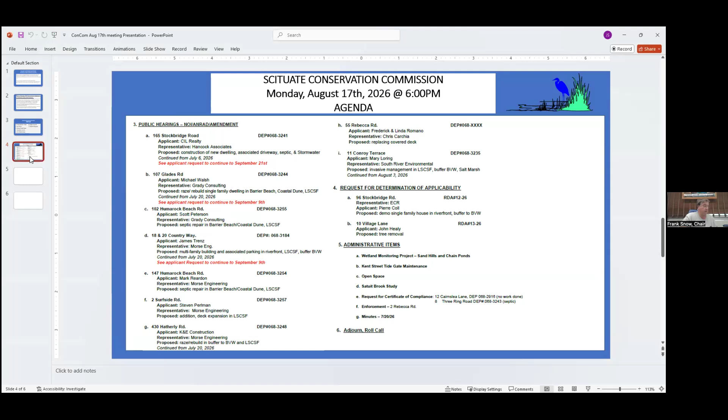So that said, we have an agenda. Are there any additions, omissions, or changes to the agenda? I don't think so. Just so folks know,

1820 Country Way has requested a continuance till September. We'll read that at the time of the hearing. Is that the only one being continued? No, there's two more. Stockbridge Road to September 21st and 107 Glades Road to September 9th. So if you're waiting for those, 165 Stockbridge is requesting a continuance, and 107 Glades is as well. They're not going to be held tonight, but we'll move right into them now. Any other additions or omissions to the agenda? No.

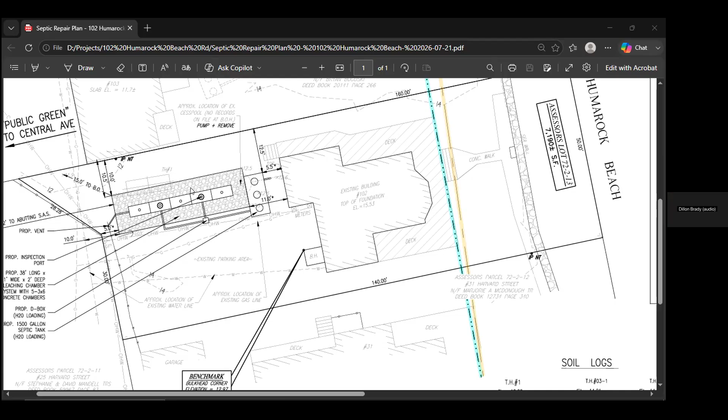I know it's a little redundant, but is that all gravel that's there now? Do you know? It's sand, it's coastal dune sand. So a silt sock would actually— we're amenable to that. Just wrapping it around, we can connect it with the deck. So basically go around the system and be open so you can get equipment in and out. Okay, right, okay.

I think that's it for me. And we asked anybody in the audience, right? No. Frank? Yes, just one thing, Jen, could you put in the orders if the vegetation does get hurt, destroyed, that they will replace it if need be on the south side? Yes. Okay, that's all I wanted. Thank you.

So, you want me to make a motion? I make a motion to close this issue. It's a motion from Penny. Do we have a second? Second from Brendan. All in favor? Eric? Yes. Roger? Yes. Robbie? Yes. And Frank, yes.

Okay, 1820 Country Way, and they've asked to be continued to September 9th. I'll make a motion to continue 18 and 20 Country Way to September 9th. Second from Brendan. All in favor? Eric? Yes. Roger? Yes. Robbie? Yes. And Frank, yes.

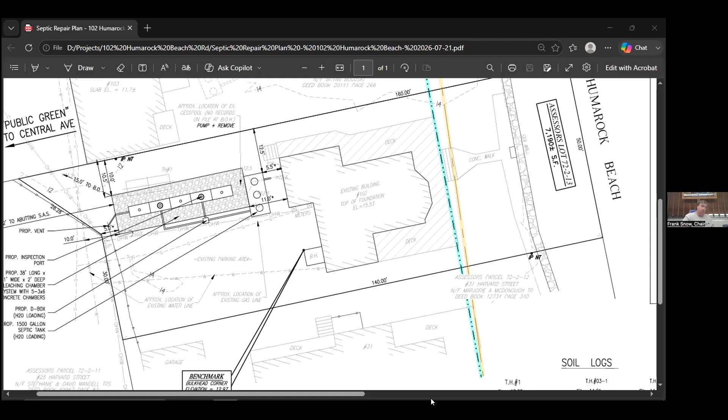So now we're on to 147. 147 Humarock Beach Road on August 17th, 2026, 6 p.m.

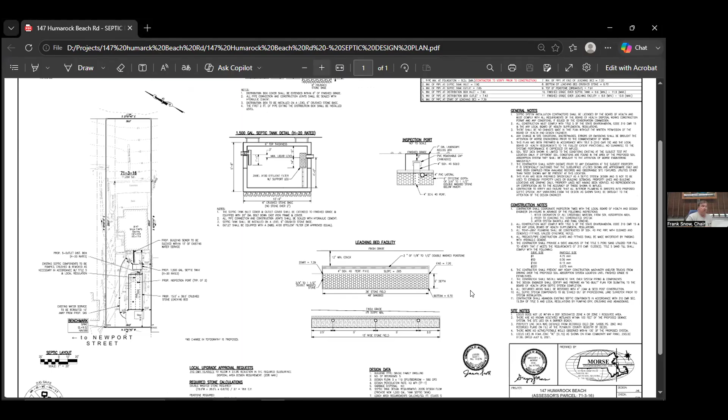The Scituate Conservation Commission will hold a wetlands hearing under Chapter 131, Section 40 of Massachusetts General Laws and Section 30700 Town of Scituate Code of Bylaws for a notice of intent filed by Mark Reardon for the repair of an existing septic system within a wetlands resource area located at 147 Humarock Beach Road, Humarock Beach, Scituate. Abutters and other interested parties are invited to attend. Information to access the meeting is available on the agenda posted on the town website.

So what do we have on that one? This is Greg Morse. Good evening, Greg. Good evening. For the record, Greg Morse, registered engineer, Morse Engineering, representing the property owner, Mark Reardon.

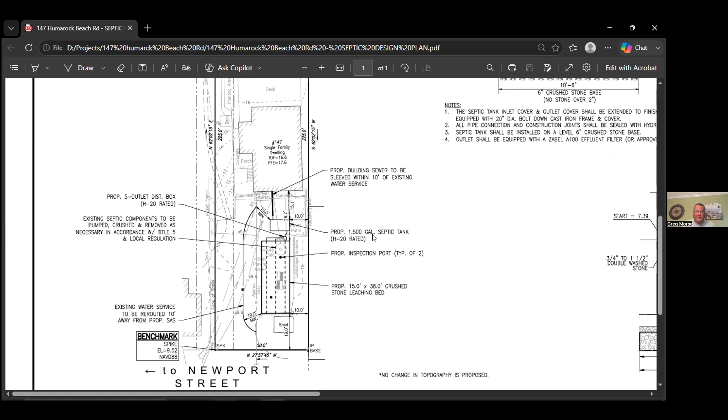This is a notice of intent at 147 Humarock Beach Road for a septic system repair project. The existing site is approximately 11,250 square feet. There's an existing 5-bedroom home. Looking at the plan here, Humarock Beach, the Atlantic Ocean, is just off the top of the page. You see the existing home location, and in front of the house, there's a gravel driveway. Under that gravel driveway, there's a failed cesspool. The proposal here is to replace that cesspool with a Title V compliant system.

The new system is a 1,500-gallon septic tank, a distribution box, and a crushed stone leaching field. As part of that, we're relocating the water service to get 10 feet of separation between the water service and the septic system. The property, as you know, is a barrier beach, coastal dune. We're not proposing any change in the ground surface. The topography there, post-construction, will match what it is today.

This is entirely within land subject to coastal storm flowage. This is a velocity zone, VE 15. For reference, the contours where we're doing the work are at approximately elevation 10. Again, this isn't new construction, we're not adding any flow. This is repair or replacement of a failed cesspool. I'll turn it over to you.

Okay, thank you. Jen? Yes, similar comments. DEP issued a number and they did not have any comments. Board of Health is okay with the plan. I didn't have any other questions.

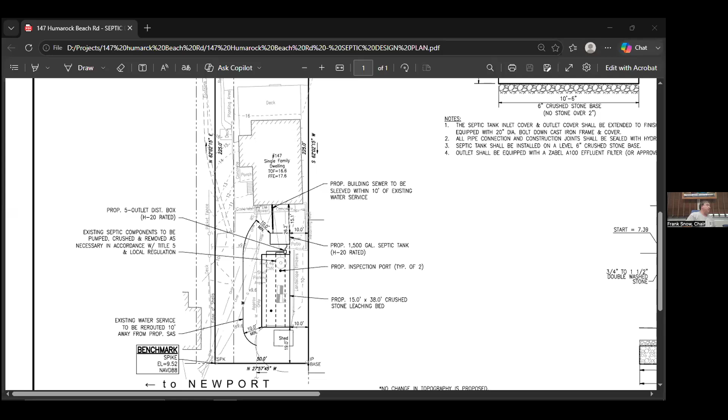I have to open this one. On August 17th, 2026, Scituate Conservation Commission will hold a wetlands hearing under Chapter 131, Section 40 of the Mass General Laws and Section 30700, Town of Scituate Code of Bylaws, for notice of intent filed by Steven Perlman for the construction of an addition, deck expansion within the wetlands resource located at 2 Surfside Road, Scituate. Abutters and other interested parties are invited to attend. Information to access the meetings is available on the agenda posted on the website.

Again, for the record, Gregory Morse, registered engineer, representing the property owner, Steve Perlman. This is a notice of intent for his property at 2 Surfside Road, which is down in the Minot neighborhood.

This property is at the corner of Gannett Road and Surfside Road. It's an 11,198 square foot lot within land subject to coastal storm flowage, the only resource area at the site. The FEMA floodplain here is an AE zone at elevation 16, and the topography on the site is generally at elevation 14.

As you see on the plan here, the property was previously developed. There's a single family home and a driveway, connected to municipal water and sewer service. The proposal is to construct an addition to the single family home, and that's in a couple of parts.

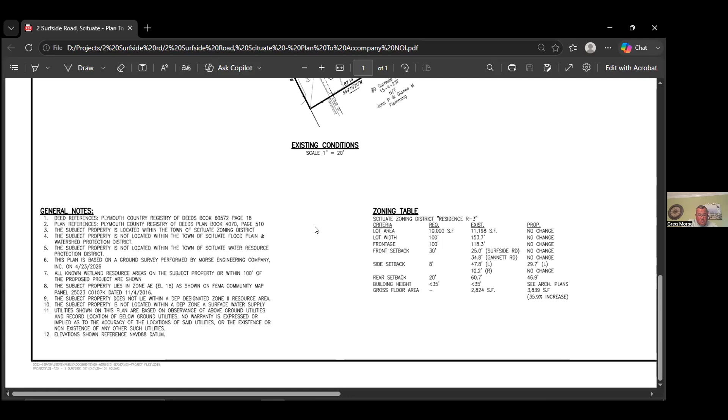Do we have an infiltration rate, or are we just... Let's see if we go down to brick pavers, the pavement. Yeah, what we're specifying under it, we have 12 inches of gravel, an inch of washed stone, and then bedding sand, and then the pavers on top of that.

So we didn't provide an infiltration rate for it, simply because it's below the standards for a stormwater permit. Even if the driveway itself wasn't considered pervious, it would still be below the thresholds for a stormwater permit. Okay, right, thank you, that was my only question.

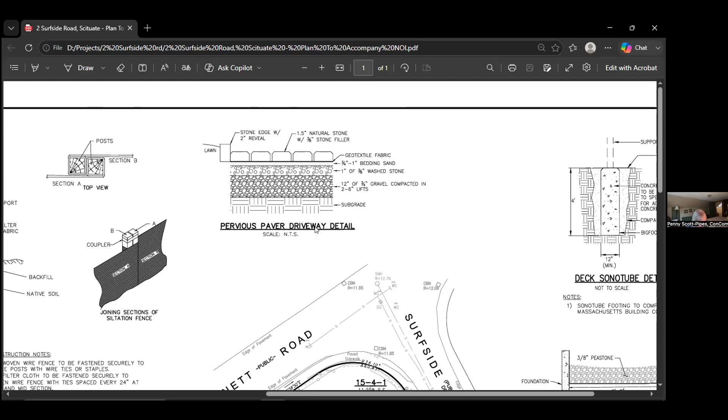All right, do we have anybody in the audience for this one? Go ahead, Jen. No, I was gonna say I don't see any hands raised. I don't know that I have any.

I think it was Robbie that raised the question about elevating to the 2 feet. And it's my understanding on these projects, if the building department deems the value of the renovation or addition to be less than 50% of the value of the existing structure, then the applicant's not required to elevate the house up.

That other one dealt with this several years ago, where there was a house that was just at 1 foot, or maybe at base flood, and because the value of the renovations didn't exceed 50% of the value of the structure, the building department didn't require them to elevate the building. If it was a substantial renovation where everything was getting rebuilt, that could come into question whether it should be elevated the other foot.

But it was sort of left up to the building department for their compliance with the FEMA regulation. That's how I recall it.

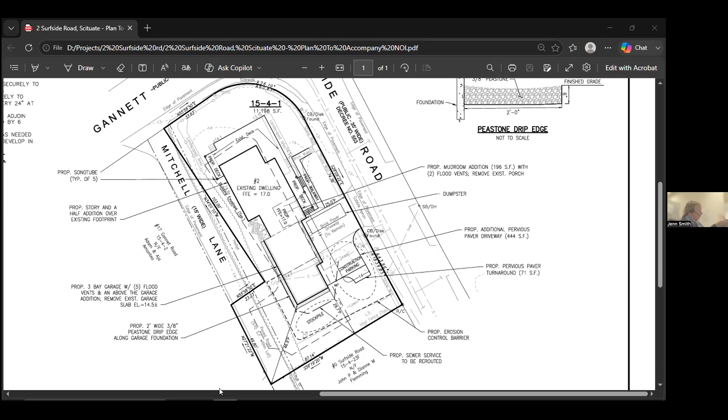For the applicant, K&E Construction, Gregory Morse, registered engineer. This was opened previously. This is a notice of intent for a raise and rebuild of a single-family home at 430 Hatherly Road.

Since the last meeting, we submitted revised plans, both my office as well as Brad Holmes, our wetland scientist, and we made a couple of revisions. Those revisions I'll point out here: we specified under the elevated deck on the back of the house that it would just be crushed stone, not patio surface.

Secondly, we added extra construction detail at the front of the property, identifying the soil stockpile location, dumpster location, and contractor parking, which is in the front yard over the existing driveway surface already at the site. Then thirdly, along the back of the property, which abuts Musquashcut Pond...

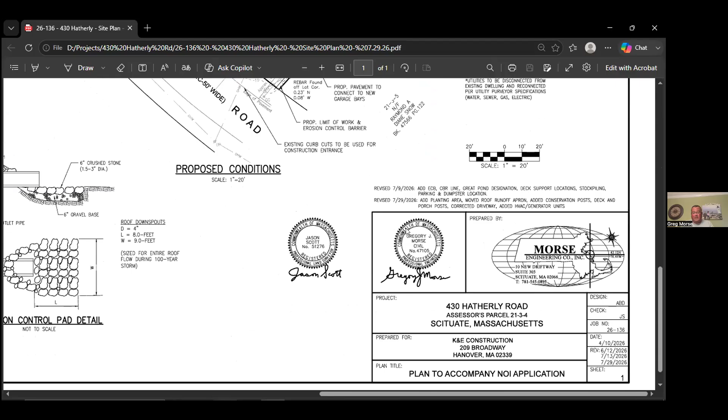One of the questions I have—is there any other building on this property that exists today that's being taken down? There's a house on the property, and there's also a shed in the backyard. The shed comes down as well. The shed is coming down. Okay, yes it is.

I just want to make sure, if there are other sheds, are they planning on putting a shed back up at some point? Not as part of this proposal, no. Okay, perfect. That's all I got, Frank.

Is this a full foundation on this project? It's a poured concrete foundation, yes. Is it the same footprint as the original foundation? No, it is larger in size.

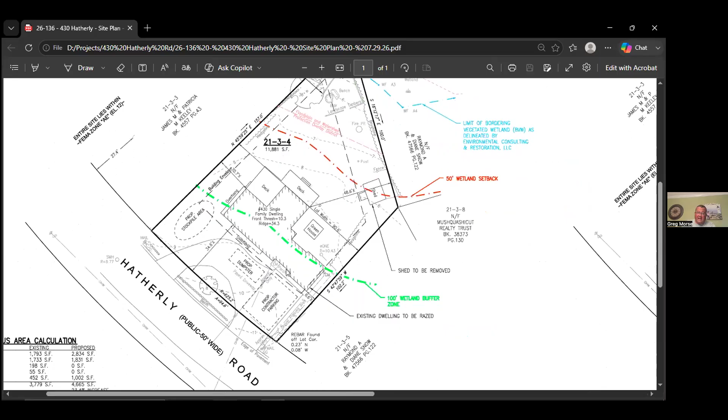Is there any way we can show the existing? Yes, so the existing is shown as a dashed gray line. If you zoom in to where the proposed house is going, you can see that we've overlaid it. So this puts more structure and more foundation closer to the resource area? It does—it's outside of the 50-foot buffer zone for the foundation itself, but it is more structure inside of the 100-foot buffer.

It looks like the site slopes from Hatherly towards the pond, and I assume there's some erosion control measures to protect the pond area. Yes, there's erosion control around the entire limit of work. No other questions for me, thank you.

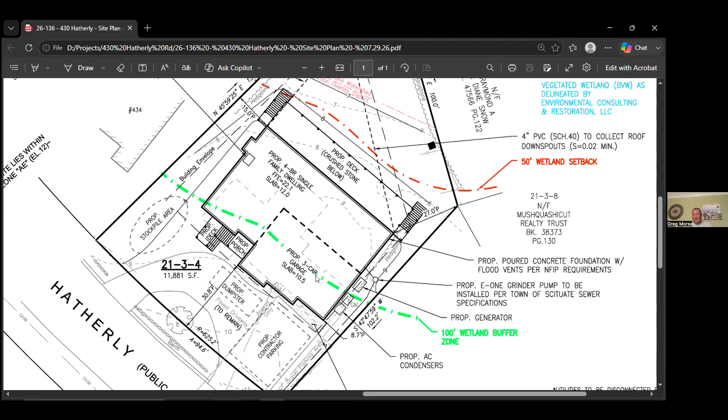This is on the corner, right? No, Greg? Well, it looks like it—Musquashkett—so if you're going down Gannett Road and you get to Hatherly Road, you take a right, and you'll cross over the salt marsh, and Musquashcut Pond is on your left. This is either the second or third house on the left-hand side as you start going up the hill.

So it is on the bend there. It's not on the corner of the street, but it is on the bend in the road. Now I can visualize it completely—I know exactly what we're getting rid of and what's going to be a brand new house there. That was my only question, I wanted to make sure I was in the right area. No, it looks good to me. Thank you.

Okay, Brendan? Oh, yeah, I think I'm all set. Thank you.

Okay, Eric? Couple questions. I'll start with the limit of work, being the entire site. There's infrastructure that needs to be installed within it, including the discharge area as well as the trench for the piping to lead to that. Is there any other sort of filtration that will be done, except outside of that riprap apron for the roof runoff discharge, Greg?

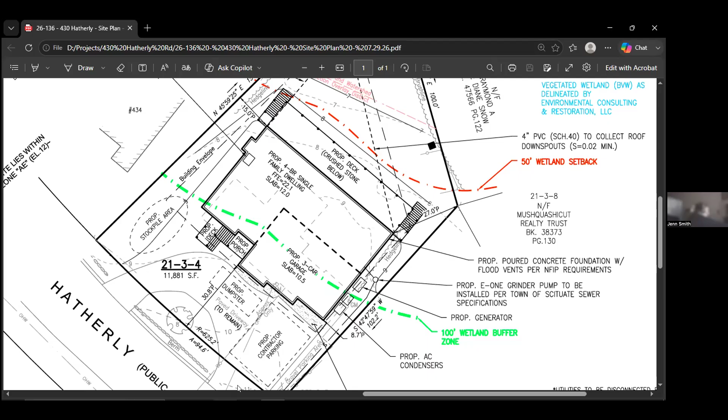Do we have a plan from Brad for that area? Yes, you do. Yes, we have that. And Eric, did you see that, or are we okay with that? Yes, I've seen it. Ted, what's your thought on the path, I guess?

I mean, ideally there would be no path, and have that whole area return to a natural state. But I think if it's managed properly, and there's no creep - because I think that's something we all can agree on, that the creep, and as Jen pointed out, not having it become a managed space is really important for this mitigation area to function as we'd like it to.

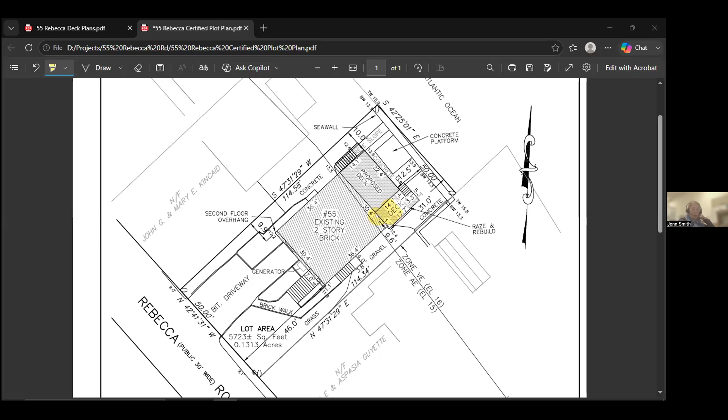11 Conroy Terrace. Did we open this? Yes, we opened it but we haven't discussed it. And do we have somebody on for this? Yes, John Zimmer is here. Okay, all set? Good evening.

Good evening. John Zimmer with South River Environmental on behalf of Mary Alice Loring, the owner and applicant for 11 Conroy Terrace. This is actually a proposal that was reviewed and approved by the commission back in 2014 under an RDA, basically to control invasive species within the property, predominantly Phragmites.

So that determination of applicability, which was a negative, has obviously expired. Ms. Loring is looking to do basically the same exact thing as she did previously, but we decided to file it under a notice of intent so it could be conducted in perpetuity, so she wouldn't have to keep coming back to the commission every 3 years for the same activities.

She's also in the process of, I believe, moving the property to her daughter, so she wanted to have that in perpetuity so that her daughter could continue to work afterwards.

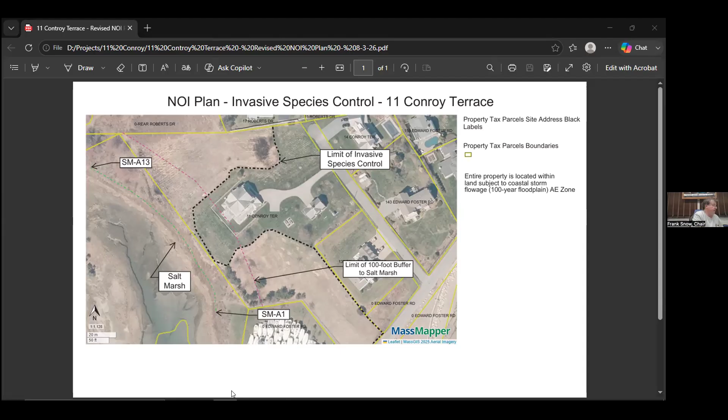So now we're on to RDAs, 96 Stockbridge Road, on August 17th, 6 p.m. The Scituate Conservation Commission will hold a wetlands hearing under Chapter 131, Section 40, Massachusetts General Laws, Section 30700, Town of Scituate Code of Bylaws, for an RDA filed by Pierre Cole for the demolition of a single-family dwelling within the buffer of wetlands resource located at 96 Stockbridge Road. Abutters and other interested parties are invited to attend. Information, access, and meetings are available on the website.

And we have maybe Brad Holmes for this one. Good evening, members of the commission. Brad Holmes with ECR. Along with me this evening is Lee Bloom, a representative for the applicant. We filed a request for determination of applicability for the property at 90 and 96 Stockbridge Road. The commission is familiar with this property—we're underway with a notice of intent for a single-family home reconstruction project here. The need has come to remove the existing dilapidated home.

There's been vandals and it's been an issue, and we may not have a permit to move forward with the larger project. We'd like to get a determination confirming that removal and demolition of the home doesn't require filing a notice and can continue. Then when we have permits for the other project under review, we can proceed. The commission has seen it's in rough shape, with recent vandalism requiring them to board up the building, so it makes sense to remove it now to eliminate that hazard. The work does occur within the buffer zone—there's a bordering vegetative wetland we've delineated that's under review, and we are within the outer riverfront area.

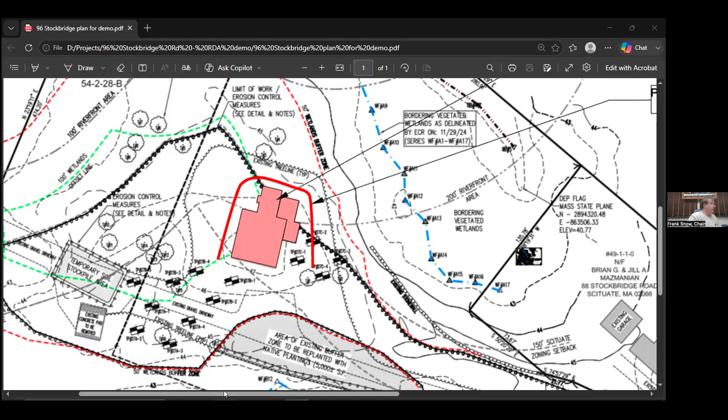You should let me know if you need me to pull something up. I got the folder. Hold on. Shoot. I don't see anything. I'm just wondering if I can go back to one of the other ones and just add a limit, Jen. All right, well, I can bring it over. That's all right. Pitched a bunch of stuff. Sorry. Sorry about that, thank you.

On August 17th, 2026, 6 p.m., Scituate Conservation Commission will hold a wetlands hearing under Chapter 131, Section 40 of the Massachusetts General Laws, and Section 30700, Town of Scituate Code of Bylaws, for request for determination filed by John Healy for the removal of diseased trees located at 10 Village Lane, Scituate. Abutters and other interested parties are invited to attend. Information and access to meetings available on the agenda posted on the website. And do we have someone?

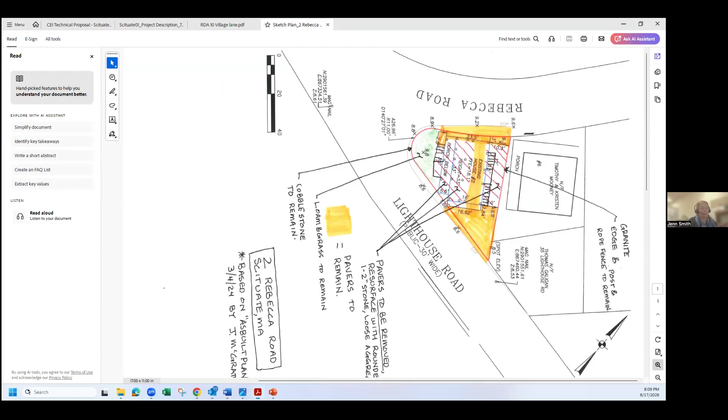What? I'm working on bringing up an image. That was the house on the corner of Rebecca and Lighthouse, and they had installed pavers on site and done some other work after the certificate of compliance was closed out. So we sent him notification, and he got in contact with Morse Engineering to come up with a proposal for addressing it. I'm working on how to share my screen at the moment. Hold on. I'll try to zoom in a bit, but hopefully you see Rebecca Road and Lighthouse.

Yeah, and actually, let me try to undo. Morse, if he would like to speak to it also, what the update is.

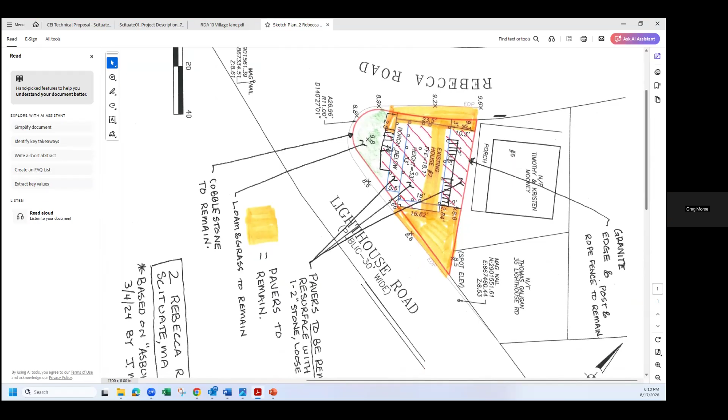Great, thanks. This is Greg Morse representing the property owner, Paul Tyrell, who's also on the call with us tonight. As was just explained, this was an enforcement issued on the property at Rebecca Road. This was a new house built in the last two years. A certificate of compliance was issued on the house itself, but after occupancy, there was landscaping performed on the site. They took the area under the house and adjacent to the roads and put down pavers across the property, and at the intersection of Rebecca Road and Lighthouse Road, at that island or centerpiece, there was some loam, seed, and cobblestones placed along the edge of the road. That resulted in an enforcement being issued.

In response, Morse Engineering has been watching the site over the past winter to see how it's performing, and we put together a letter and a sketch of what the property owner would like to do to hopefully remedy the situation. It's unfortunate that this is an after-the-fact thing. The homeowner thought they were done with the project and thought this was just landscaping. They've appeared before the commission for this and other permitting projects at this and other properties they own, and didn't realize they needed a permit for this work.

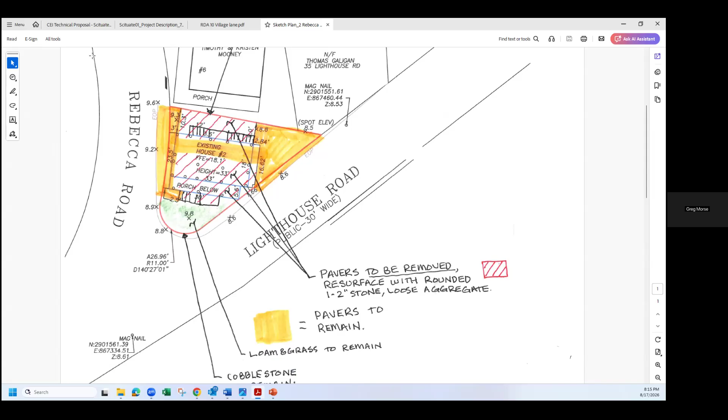This is our proposal on how to address that enforcement action, and we look forward to working with the commission to get this resolved. I'll turn it over to you. Thank you, Greg. Jen, do you want to start first?

Sure, I just want to add that this is a unique site. I agree with the delineation comments we had for the area. This part of Scituate does get hit with storms and has significant storm action, but it's a very unique site given that it's a corner lot on Rebecca and Lighthouse, with pretty much two homes immediately behind it. So it's not your traditional rectangle by any means, it doesn't have some extensive backyard.

So having said that, I can appreciate having some sort of apron and definition for just using the property. That's all I have for now. They had loosely presented this idea to me a while ago, and it's just taken a bit to have time on the agenda to bring it to the commission.

Sure. Where do I want to start? Guess last time, Brendan? Want to comment on that? Can I hold, please, for now, I guess? Thanks. Yeah. Eric?

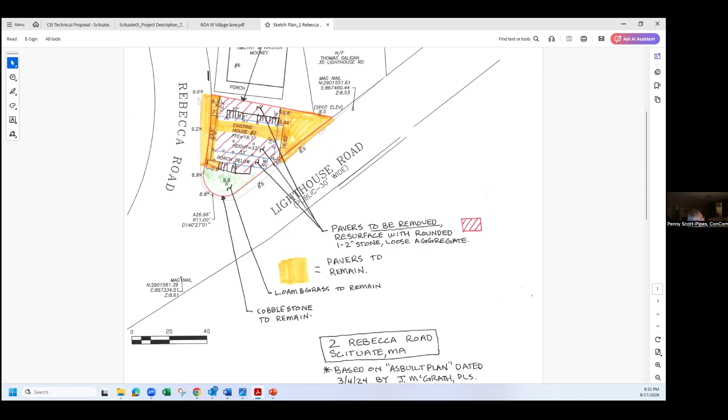So the layout is what's shown, not the edge of the road. So the layout of the road is shown, and they clearly went out to the edge of the road, not saying the rest of this is all good, but everybody that does a driveway connects to the road. Your own driveway at your house is paved out to the edge of the road, we don't leave a gap between the road. So I'm not saying other things aren't an issue, but everybody connects to the road, we don't leave gaps. Not by that footage on Rebecca Road.

That aside, Frank, I don't agree at all with the pavers. They never should have put them down. They all should come up. I'm dead set against this. I'm so tired of people doing what they want and then come to us.

Moving on. All right, Brendan. Yeah, I'm kind of with Penny on this, considering we went through a process to get this built. Whether or not I personally think it should have been built, or on this lot, this is what someone decided to do. It should be known that they were supposed to come to us about the pavers.

I haven't really heard an argument on why they should stay. I did hear that they were watching them for some time, through some storms, but do we have an infiltration rate on these pavers? On the pavers themselves, no. I haven't calculated an infiltration rate. Otherwise, they're a pervious material and they're below the 100-year flood event. This whole area is underwater during flooding events. Doesn't matter if it's pervious or not.

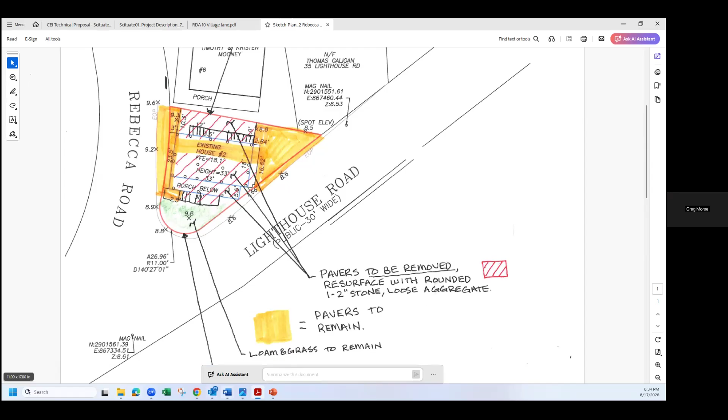I believe the existing house was on the ground, and the property owner is raising his hand. He could probably answer that question better. I wasn't the original engineer on this. Additionally, I emailed a couple photographs of the site that might help put some things into perspective. But Paul Terrell was just raising his hand if you want to hear from the homeowner. Okay, yes, and I did unmute him, and I will work on these photos.

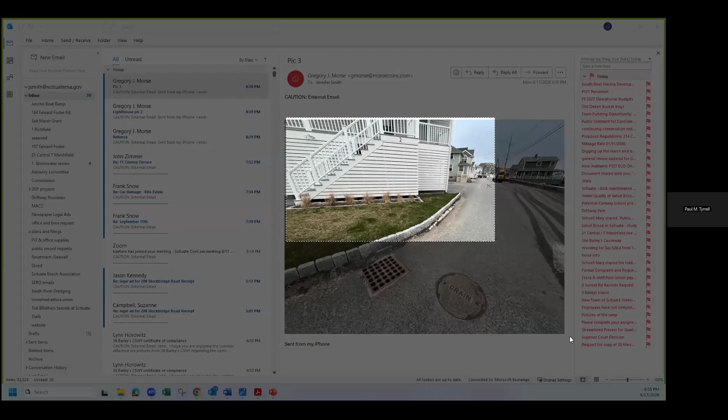Hey, thanks Jen. A couple things: I'll answer Frank's question. As I've said to Jen repeatedly, this was not done in the darkness of night, it was done as a landscaping thing. It's unfortunate, and we are also very upset that we have to be here talking to you about this. So I don't want you to think we are trying to do something wrong, it's right in the middle of the street, we can't hide anything, trust me. But in any event, notwithstanding that, your question Frank, it was

probably 4 or 5 feet up. This is a prefab, but the original cottage was the original cottage, right? So it was up a bit, but nowhere near the elevations we had to put it up to when we did this project. But was it on a block foundation or poured foundation? No, it was on cedar posts. No, originally it was cedar posts, it got raised and became concrete posts when Michael Ball raised it. Okay, and so that all came down when we raised it this second or third time. Got it, so it was not on a foundation, it was on piers.

Okay, and Jen, the photos you're showing now, is that existing? Yes. Okay, so was that curb added that goes around the circle? Did the cobble, was that there before or did you add the cobble? So the photograph on the right shows the cobblestones that were added as part of the project, and the grass that was put behind it. You'll see in front of those cobbles, there was already a concrete curb there.

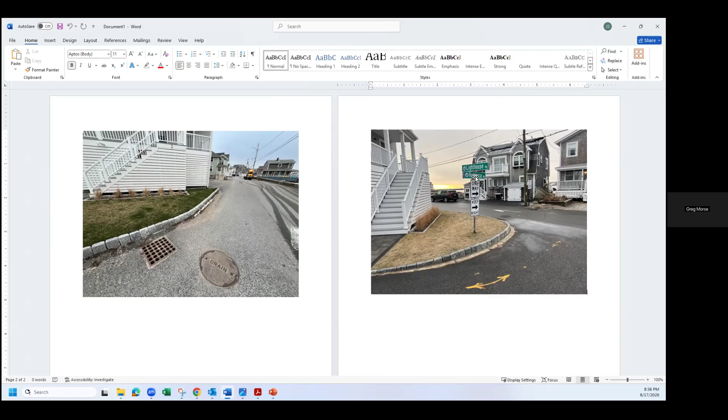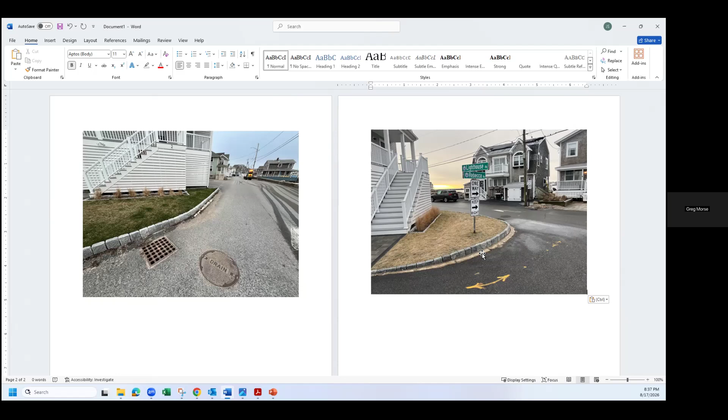That concrete curb directed water around the corner to the catch basin you see in the left photograph. But that curb essentially became non-effective because the road keeps getting raised. Every time it gets paved, it loses 2 inches of height. So that curbstone wasn't effective directing stormwater to the catch basin. These cobblestones do provide a purpose: they retain stormwater in the street and create a gutter that gets the water to the catch basin.

Do we have any other photos around the side or anything? There should be another one that looks down Lighthouse Road here. You also see in this left photograph the street sweeper coming along and removing all the sediment.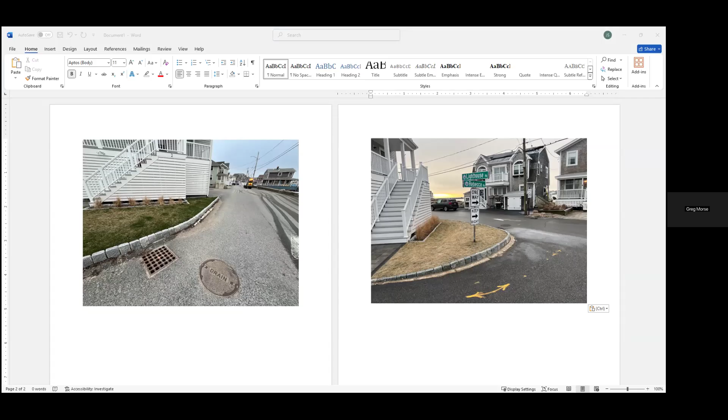When I look at this site, I think this is a coastal barrier beach. It's supposed to provide sediment to a down-gradient resource, but it's exactly the opposite of what this whole point does. Thinking about it in the big picture, we're building seawalls along the ocean to prevent water from coming landward. We're physically dredging the harbor and removing sediment that moves landward. And we have street sweepers coming out and not putting the sediment back on the coastal dune — they're removing it from the site and the region entirely. This is not a pristine coastal bank or dune, not a barrier beach functioning in any way. It's an altered resource.

As far as flood prevention, the whole area is underwater — we know that during one of these blizzard events. The whole area out there, whether it's pavers or stone, is going to be underwater.

There should be another photograph, Jen — yep, of Lighthouse Road. I got too many things open and I don't know what screen I'm showing right now. All right, Lighthouse Road, this one, here it is.

What were the accommodations for parking prior to this project, either Greg or Mr. Terrell?

I'm working on it, hold on, I'm going to unmute Paul. I think it was just like you could kind of pull off the road a bit, front to the side, on both sides you could put a car. So when we raised it, you could now get two cars under — more cars on the property. You can see you could put one car where that opening is, and look at how big the openings are, very big for that purpose, to keep it very open was the design. So it was intended to have additional parking as a usage if we could.

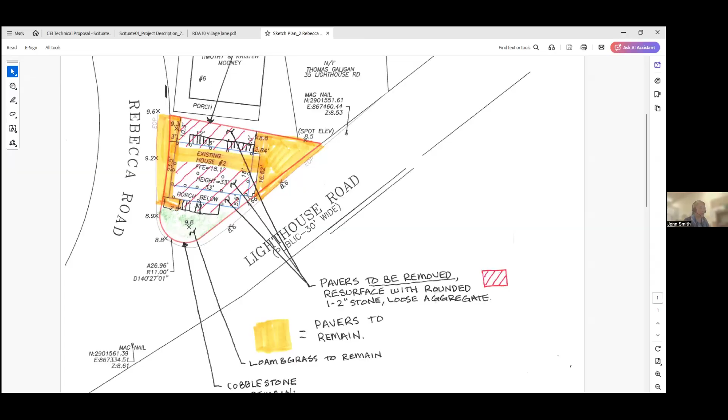So I guess two things. It sounds like maybe in the next month some of the monitoring over the Sand Hills Marsh will begin, evaluating tidal exchange and tide gate performance through field monitoring, infrastructure assessment, survey activities, and vegetation characteristics. And then Chain Pond, similarly, focusing on documenting drainage connectivity and existing conditions associated with the ponds, channels, culverts, and adjacent wetland systems. So hopefully some more information will come out of that.

Well, I guess I should just keep to the screen for the moment. Over on Kent Street, I did have a question about there's a tide gate there for the salt marsh that goes under the road, and a while ago it was blocked. And they want to remove what's blocking it to allow the flow to continue.

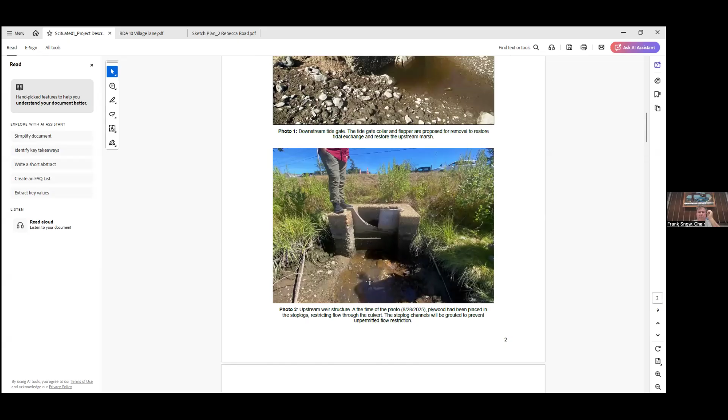So is that something that they would come to us in a filing, or how would that be addressed? Well, one request was possibly it could be an RDA, just for a chance to discuss it a bit more. Hopefully you're seeing the screen where the culvert is semi-blocked, so it's not just removing this piece. I think they want to kind of fill in these slats here, so it's a little bit more complicated.

Well, if they can make it function better, I don't have a problem with them coming in as an RDA. I mean, they've got an idea of what they want to protect there. Does anybody else have any? I know this is a little disjointed, and we've seen this - maybe go back to the aerial.

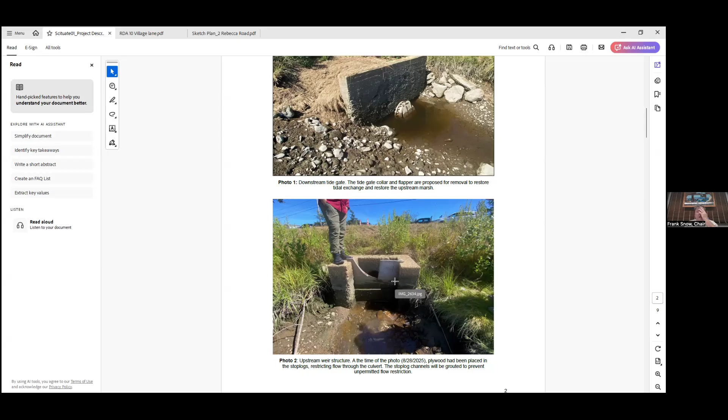So you're coming out of Scituate Harbor. Right, Scituate Harbor's up here. Go past Ridge Hill towards the dump. Correct, we got Ridge Hill. Yep, it's right after that - there's where the bog was, homes right here.

I would say any improvement they could do to get some water to move back and forth would be a positive. Anybody else? I just had a question - when you guys said who could block it, or who's blocking it, is that like a city blocking it at different times, or is it community members who are trying to do something?

I think that beavers and hockey players make the best dam builders. Yeah, all right, I think the neighborhood in the winter might slow that water flow going out of there, Roger. Okay, that's what you guys mentioned, that they can block it or they blocked it. I just wanted to get a better understanding of who they were, and so forth. So, all right.

But I think it's also that the structures have just deteriorated, so they can't open or close. So during most of the year, the water should be able to flow in both directions, and it looks like right now it's not doing a very good job.